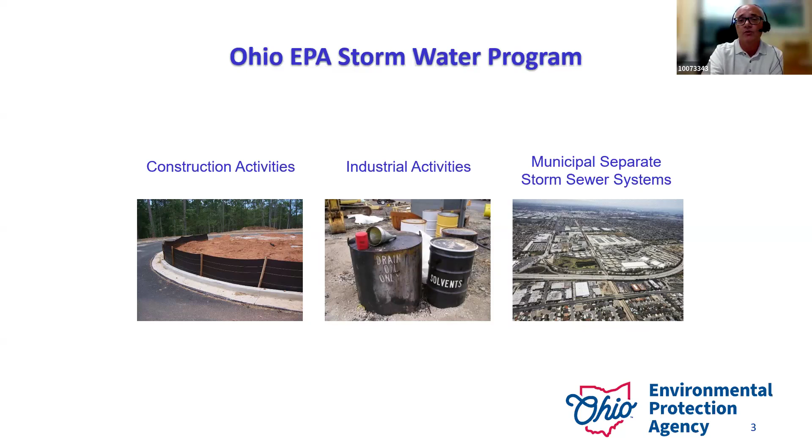The stormwater permit program is really a part of the NPDES permit program, or National Pollutant Discharge Elimination System permit program, that was established under the Federal Clean Water Act back in 1972. Originally, those permits were really just issued to wastewater discharges, and it really wasn't until 1992 that they were applied to stormwater runoff. Within Ohio, it's codified within Ohio Revised Code 6111 that in order to discharge pollutants in runoff from your site, if you're one of those regulated activities, you have to have an NPDES permit and comply with it.

So you will need a permit if you discharge your runoff to waters of the state or to a municipal separate storm sewer system, or MS4, which is basically a publicly owned conveyance system for stormwater. But if you discharge your runoff to sanitary sewers or to a combined sewer system upstream of an overflow regulator, you really wouldn't be required to obtain an industrial stormwater permit.

And we have our first poll question. When did Ohio EPA first begin issuing stormwater general permits?

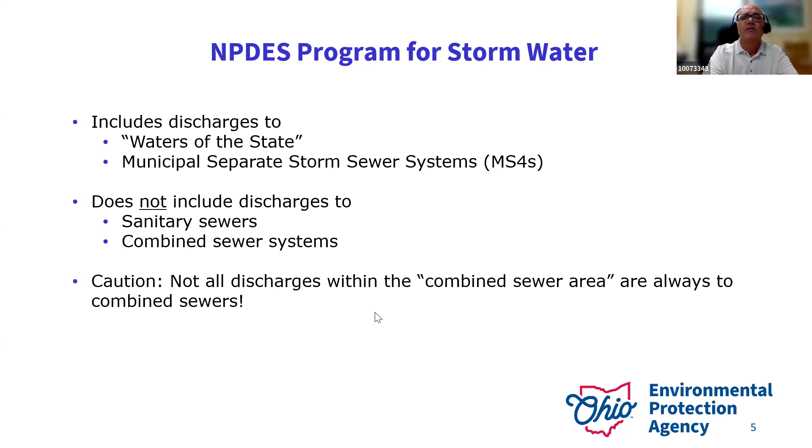All right, so who needs an industrial stormwater permit? What types of permits are out there for you to obtain the coverage that you might need? That's what we'll cover over the next section. So the definition of stormwater associated with industrial activity can be found within Ohio Administrative Code 3745-39-04(B)(13). That's where it lays out the types of facilities that would be potentially subject to needing a permit. There's 11 different categories. They're pretty broad, but if you really want to break it down in the easiest way to understand, basically, if you manufacture anything, you are likely to be pulled into the program.

We also do include some other categories that don't necessarily manufacture stuff, like maybe a recycling facility or a municipal solid waste landfill, but those are also included within that definition. So if you fall within the definition of stormwater associated with industrial activity, this program may affect you or does affect you.

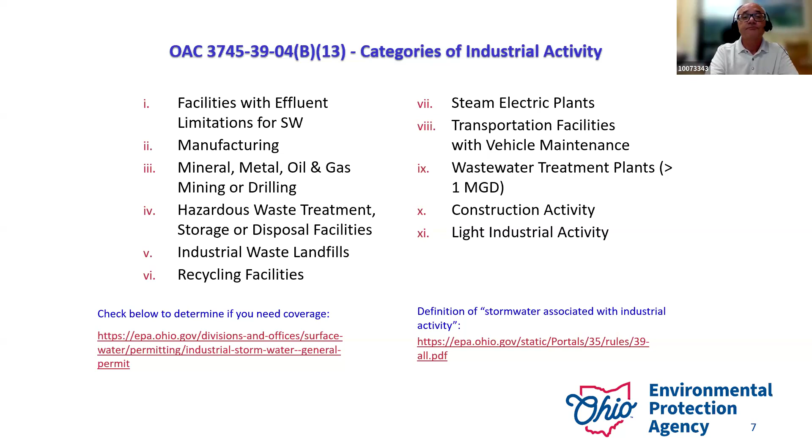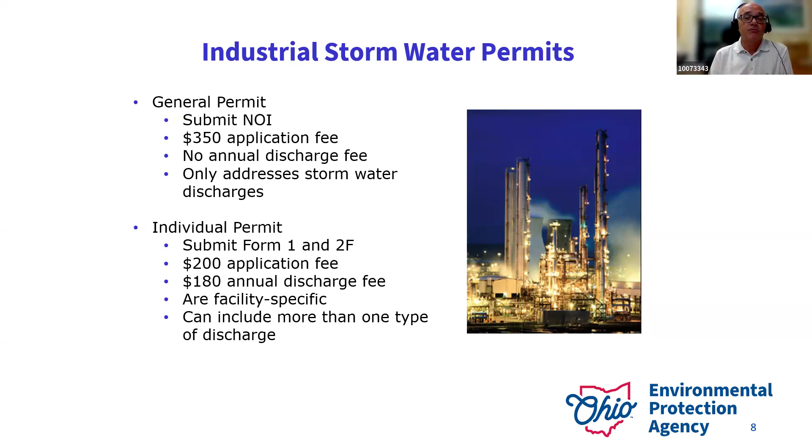All right, so in terms of getting a permit, you can get coverage under our general permit for industrial stormwater that Ohio EPA issues, or there's also some facilities that get their coverage under an individual permit. Those are typically facilities that may have more than one type of discharge that requires an NPDES permit from their site. For example, they may also discharge process wastewater in addition to the stormwater from their site, and therefore, if they've got multiple types of discharges, it might just be easier to have one permit that covers all the discharges rather than having a separate permit just for the stormwater runoff.

Ohio EPA issues that general permit once every 5 years, just like any other NPDES permit. It'll be issued in effect for 5 years and then get renewed. And terms and conditions within those permits can change from permit term to permit term.

We are currently in the 7th generation of our industrial stormwater general permit, which is also known as the multi-sector general permit, or MSGP. If you hear me use that acronym throughout this presentation, I'm just referring to our general permit. The majority of our facilities are permitted under this general permit. And on the slide, you can see some changes that have occurred to that permit over the last couple of permit terms. We'll talk about some of the significant ones that are currently in place later in the presentation.

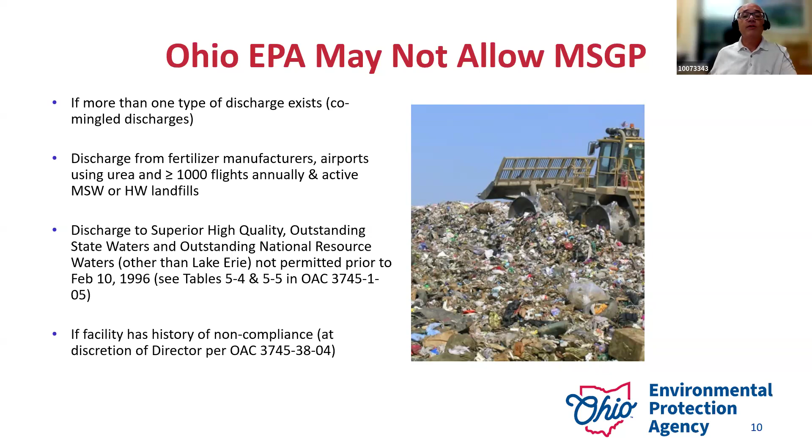Like any other general permit that Ohio EPA issues, there are eligibility requirements. So it's possible that your facility is not eligible for coverage under the general permit. If that is the case, then your option would be to obtain your coverage through an individual NPDES permit. So on the screen here, you see some of the situations that make you ineligible for coverage under the general permit that would require you to get an individual permit instead.

There's also a general permit that covers the stormwater runoff from bulk petroleum stations and terminals. It has its own separate general permit for those types of facilities, and stormwater is included within there. If you have an individual permit, look to see if your permit has parts 4, 5, and 6. If it has parts 4, 5, and 6, that means your individual permit covers your stormwater discharge.

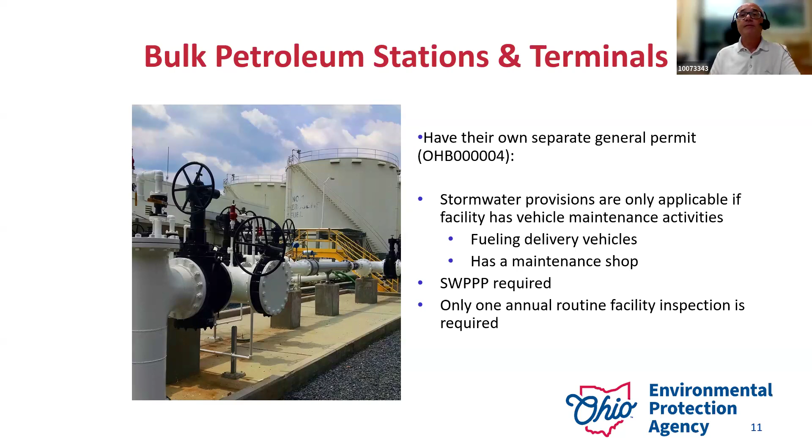Now, within the MSGP, we translate those SIC codes into what we call sector and subsector codes. And we do that using a table that you can find in Appendix D of the MSGP. And that's important to know what special conditions apply to your specific facility because of that specific activity that you do. And we'll talk more about that in a bit.

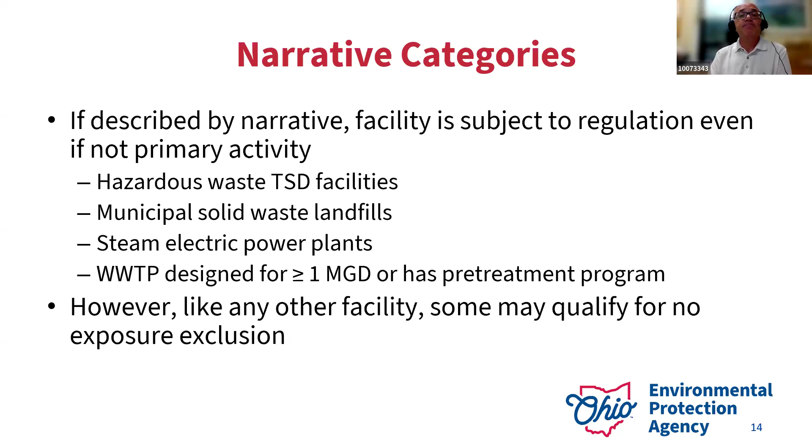All right, so if you need coverage under the general permit, if you're a brand new facility, you're supposed to develop a stormwater pollution prevention plan or a SWPPP, and then submit what's called a notice of intent or NOI for coverage under our multi-sector general permit. It's supposed to occur at least 180 days prior to when you intend to initiate your operations at the

facility. For those of you who are existing facilities and have permit coverage, every 5 years you'll get a notice to renew, and that renewal typically requires you to submit a new notice of intent and then revise your plan within a certain amount of time. So a renewal notice of intent is typically due within 90 days of the date that you're notified. And then the stormwater plan has to be amended within 180 days of your effective date of permit coverage.

Like any other NPDES permit application these days, it's all done electronically through Ohio EPA's eBusiness Center. So we have lots of guidance materials that are available to you on our website for how to complete a notice of intent, step-by-step guides with screenshots, how to set up your account in eBusiness as well.

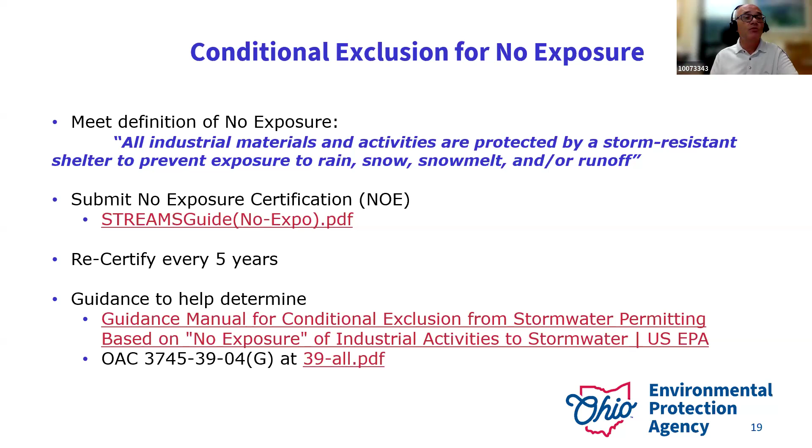There is a guidance manual available and some language in Ohio Administrative Code that you can review to determine whether or not your facility meets no exposure. But just quickly, I'll go through some examples. One common thing that might pull you into the program is having a waste dumpster exposed outside.

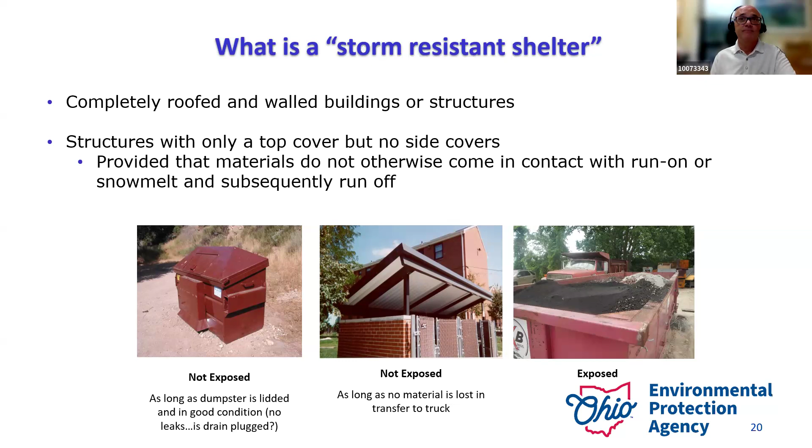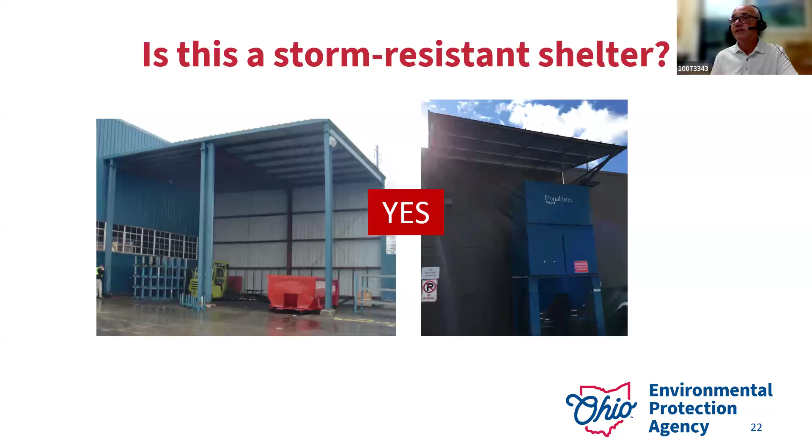Here's just some more examples of storm resistant shelters, but notice that they are structural attached roofs essentially, or awnings, metal awnings over the area where the industrial materials or activities are conducted.

In that no exposure guide, it goes into more detail about what can be exposed and not really disqualify you from the no exposure exclusion. For containers, tanks, drums, barrels, basically they have to be sealed. There can be no operational taps or valves. They have to be in good condition so nothing's leaking from them. And you cannot transfer material to or from the container while it is in an area that's exposed to stormwater.

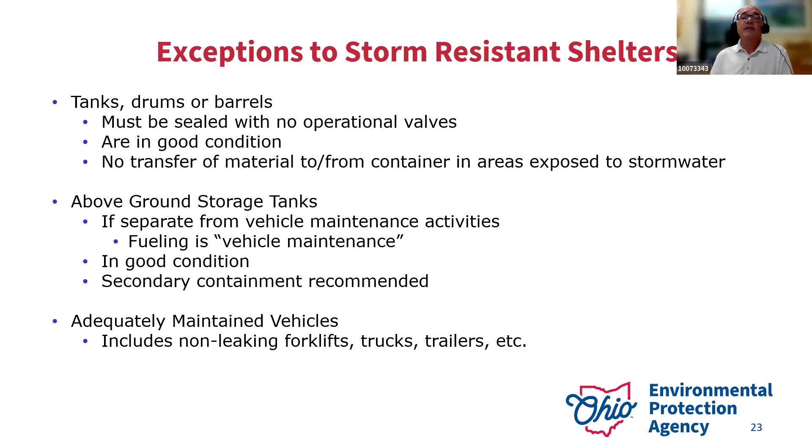So if you got a tote outside that's got a cap and it's sealed, you'd have to bring it inside the building to open the cap and add more material to it, and then you could take it back outside. So there's some conditions there, and you can see some of the other situations that also need to be thought about.

People ask us oftentimes about tarps. Well, I've got my waste dumpster and I put a tarp over it, why can't I qualify for no exposure? Ohio EPA's take on that is a tarp is a temporary type of cover. They're prone to needing more maintenance, they tear, wind can blow them, and it's very easy for people to forget to reattach them after each and every use. And so we don't accept that really as a practice for no exposure.

However, if you have a permit and you have a waste dumpster outside, tarping it is an excellent best management practice to minimize the exposure of those materials to the stormwater. So it's just all in how we look at that.

There's an exception if you're doing remodeling inside your facility and you need a construction and demolition debris temporary dumpster outside, for that temporary time period that you're doing the remodeling for that debris material. That can be at your facility outside, and it would not disqualify you from the no exposure exclusion because it's just a temporary thing that shouldn't be there for very long.

We also don't require - you also can store materials that are intended for outdoor use without just getting disqualified for the no exposure exclusion. However, there's a limit on that. It can't be things like salt or other materials that would be erodible or dissolvable.

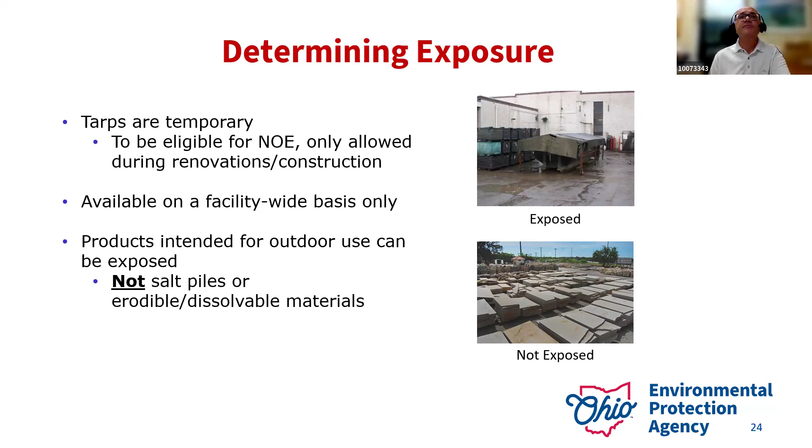Just some more examples to kind of show you here of what might be exposed and what might not be exposed, or what you might have to think about a little bit closer.

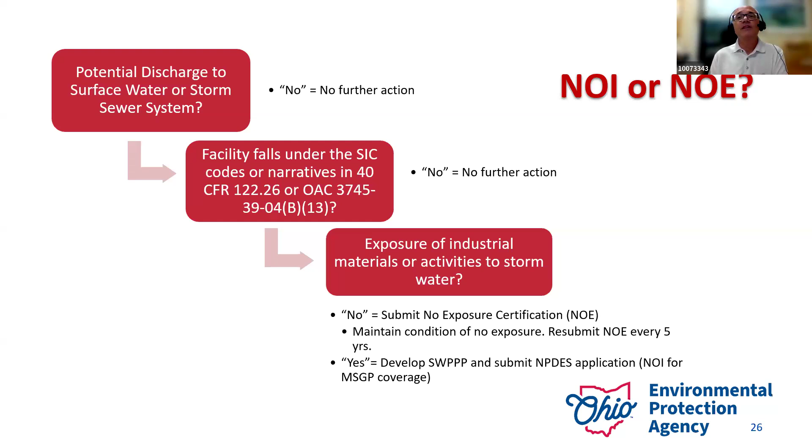So do I need to submit a notice of intent, or NOI, or a no exposure certification, NOE? Well, just follow the friendly little flow chart here and hopefully that will give you your answer. Just to give you an idea, of the roughly 4,000 plus facilities that Ohio has under our general permit program for industrial stormwater, about 2/3 of them have permits and about 1/3 of them have no exposure certifications.

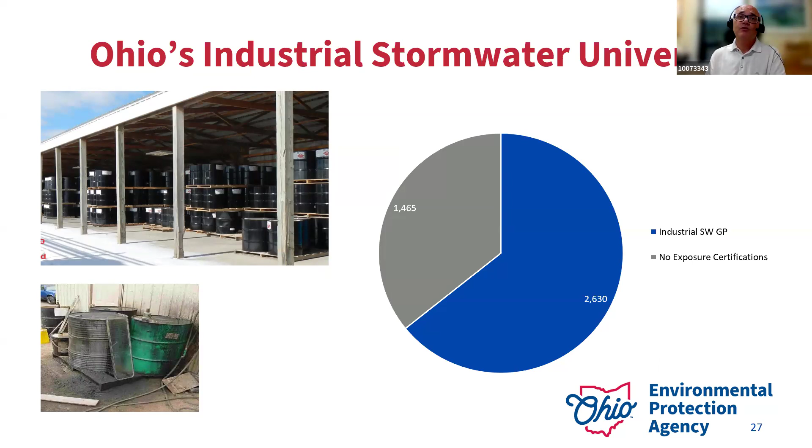All right, it's time for our second poll question. Which of these are not considered to be a storm-resistant shelter?

Sarah, you let me know when in the poll. Or did I do all that? Yep. All right, so the poll has been shared.

So the winning answer was the correct answer, a tarped waste dumpster. Remember, that's a great BMP, but it won't get you out of needing a permit. All right, very good. Let's move on. So if you need a permit, what does the permit require of you? That'll be the rest of the presentation today.

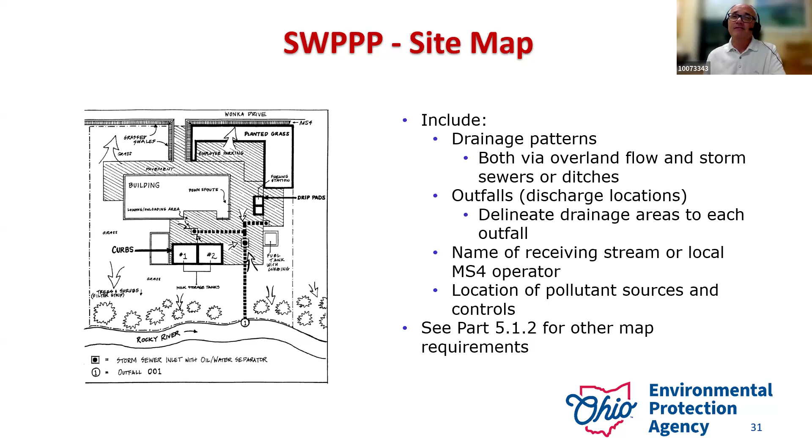It's also supposed to identify the acreage of your site. If you've got several outfalls which are substantially identical, which we'll talk about a little bit later in the presentation, it's supposed to identify which of the outfalls are substantially identical. So there's a number of requirements, and oftentimes when we do an inspection, we might find that the map isn't really as complete as it needs to be.

All right, so in terms of potential pollutant sources, you're going to basically just have a list of the materials that you handle or use at your facility. Those can be raw materials, intermediate products, byproducts, waste materials, anything that might at some point in its life at your facility become exposed to stormwater.

Think about where you load or unload those materials. Think about how you convey and transport those materials across your site. What industrial machinery do you have outside and exposed to stormwater? Where do you have storage areas, the boneyard, or your final product store, or raw material storage area on your site? Those are all areas of industrial activity, and we would need control measures for those areas.

Think about where leaks or spills are most likely to occur. Maybe you have a fuel station at your site, or maybe you've got a chemical silo outside, materials coming in and out of those containers. That's where a spill might occur. So that's also another area where you'd want to focus.

Maybe you store salt to make sure that sidewalks and parking lots are clean and safe to walk on in the winter. Where do you store that salt?

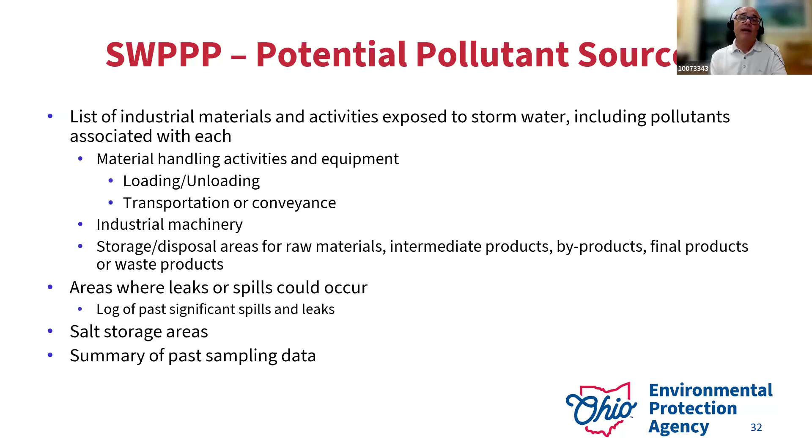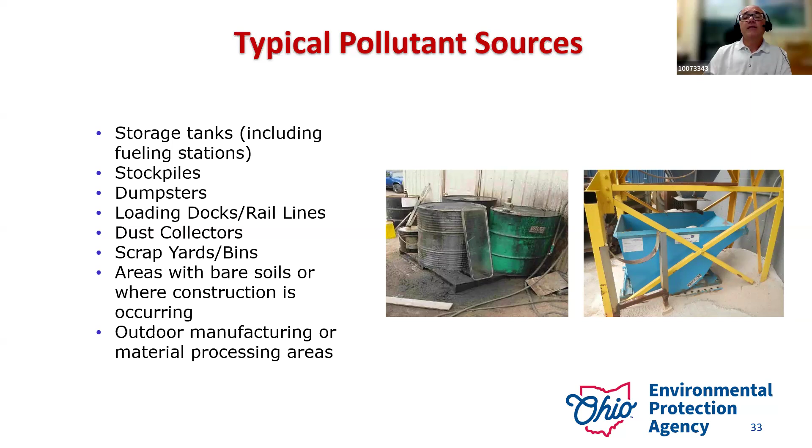So some potential typical sources that we see: storage tanks, stockpiles, dumpsters, loading docks or rail lines, dust collectors (your air pollution control equipment essentially), scrap yards or bins, areas where you have bare soils typically. Maybe it's an area that's just not paved, or maybe it's where you're doing some construction work of sorts. So that could be part of it. Or some sites, like a landfill, are always going to have an area of disturbance where there's bare soils. And then any outdoor areas where you might manufacture or process materials.

All right. One of the things that you're required to also do in development of your stormwater pollution prevention plan is to look for any non-stormwater discharges and make sure that your facility has the appropriate authorization for those non-stormwater discharges. So this is somewhat akin to doing dry weather screening in the municipal stormwater program.

But essentially, an industrial facility should be looking at their outfalls during a period of dry weather. And if they see flow, then they need to figure out why.

The permit includes a list of things that are allowed to discharge to the storm sewers that are not stormwater, but those are typically clean water sources, like maybe uncontaminated groundwater, or maybe you have a sprinkler system and that water is going beyond the grass and into the storm drain. So that kind of stuff, potable water sources, that kind of stuff is all okay.

But if it's not that, and you do see flow, you need to figure out: is it that, or is it something else? And if it's not on that list, basically it's something that you have to either appropriately permit or cease discharging from your site. That's called the non-stormwater discharge evaluation.

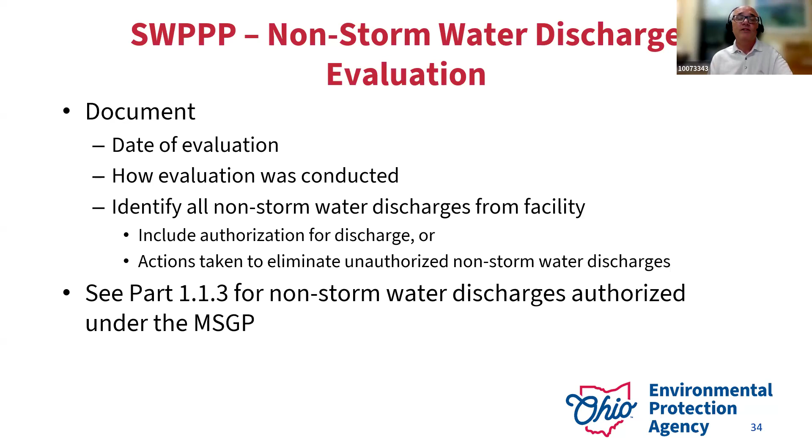So when we say cease discharge, people always assume that means stop. But then facilities think, I can never have that discharge. Well, not discharge, but there's probably a different way to handle it. So think about what typically we run into.

Maybe we run into a floor drain inside a building that is actually connected to storm rather than sanitary. So you could reroute that line to the sanitary, because all interior drains should go to the sanitary if they're allowed to discharge at all. Or you can cap that floor drain off so that nothing gets in it. So there's different ways to handle that scenario.

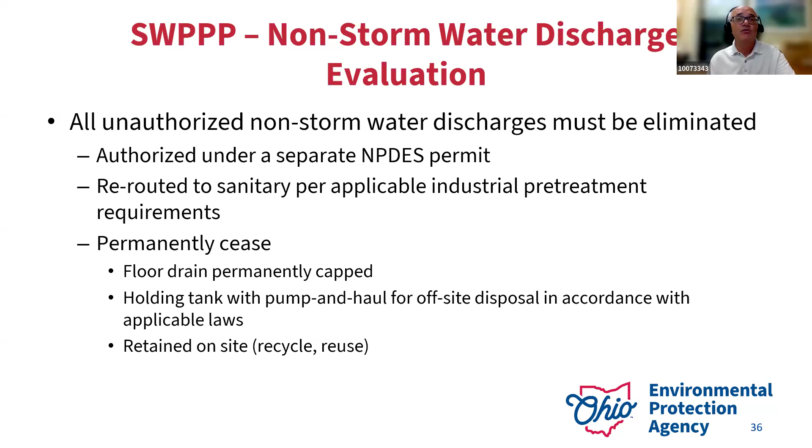Or maybe you can install a holding tank and then have an arrangement with a wastewater treatment plant locally to take that water and dispose of it there. Or you may have authorization through the wastewater treatment plant's pre-treatment program to discharge things directly to the sanitary sewer system. So those are all different ways that you can handle these non-stormwater discharges, but it is your duty when you're developing your SWPPP to evaluate your facility for these possible non-stormwater discharges and ensure that they're appropriately authorized or ceased. So learn to be a non-stormwater discharge detective.

So you might have to pour some dye down a drain to see where a floor drain goes for sure. Or you may have to climb up on your roof and see how well your air pollution control equipment is really working.

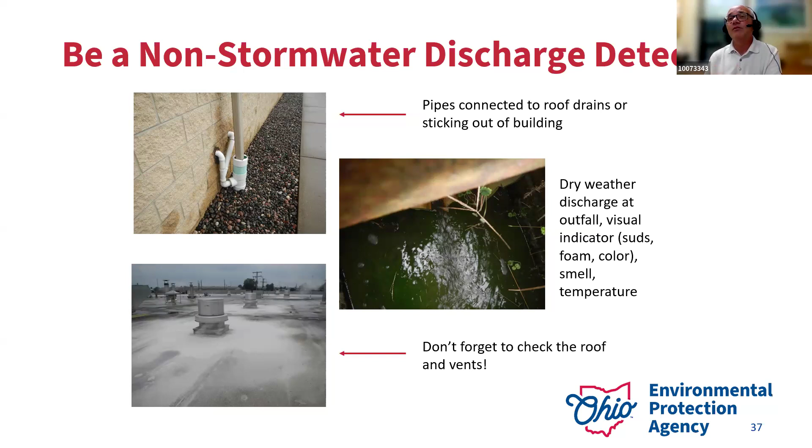As you can see in the lower left-hand corner, probably not that well. Do you have pipes sticking out of the building that are connected to the roof drains or to the storm sewer? What are those pipes? What's discharging from there? Oftentimes we find non-contact cooling water discharge that's not authorized going to our stormwater system, and that needs a separate NPDES permit to authorize. So be a stormwater detective.

In terms of control measures, there are certain control measures that are required for all. If you look at the permit, there's about 10 or 11 different sections, but they kind of boil down to the bullet points you see on the slide. So where you can...

Minimize the exposure of pollutants. Put a tarp on it, move it indoors, get a storage container of some sort, like a storage shed, stick it in there. Good housekeeping - keep things swept, clean, orderly, neat.

Preventative maintenance - you've got equipment out there. Is it on a maintenance schedule? To make sure that you don't have unintended leaks or pipe bursts that might cause oil spills and whatnot to get into storm sewers. Spill prevention and response.

If a spill occurs, do you clean it up right away? Do you have the equipment that you need to clean it up right away? Are people trained on what needs to be done when a spill occurs? That's all part of spill prevention and response.

Erosion and sediment control and runoff management is basically as it would sound. If you have unpaved areas of your facility, bare areas that don't have vegetation, do you have control measures in place to prevent sediment from getting into the storm sewer system? Or do you have maybe a stormwater management pond designed to remove pollutants from the site? If you're a newer build facility, you should have what we call a post-construction best management practice, but older facilities may or may not have something like that.

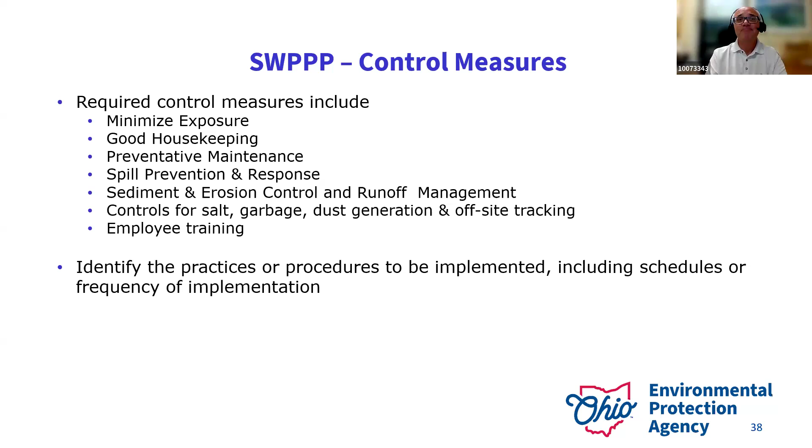Just to kind of speed up our presentation here, because I know we're starting to run a little shorter on time. In terms of how do I select my best management practices, the good news is there's lots of guidance out there. US EPA has a series of fact sheets broken down by the type of industry you are, essentially by your sector code.

That goes into, at this type of facility, these are the typical sources of stormwater pollution, and here are some suggested best management practices and control measures you can implement to address those sources. So it's kind of already laid out for you. It's not an end-all-be-all list. There was an effort a few years ago to update those lists that I don't think resulted in an updated list yet, but that might be forthcoming still.

So in addition to those fact sheets, US EPA has a guidance manual on how to develop your SWPPP and things to think about. There's also a separate manual for monitoring if that applies to your facility. So there's lots of available help.

However, I always tell people, use common sense. Is it outside? Can it get rained on? Can the runoff flow off your site, either directly into a catch basin, a drainage channel, and enter either a municipal storm sewer system or a water of the state? If the answer is yes, put something to prevent that - curbing, diking, tarping, relocating things inside, implementing good housekeeping practices and being vigilant about spill response, employing sediment and erosion controls like inlet protection on your catch basins. That goes a long way and will address a majority of the issues at your site.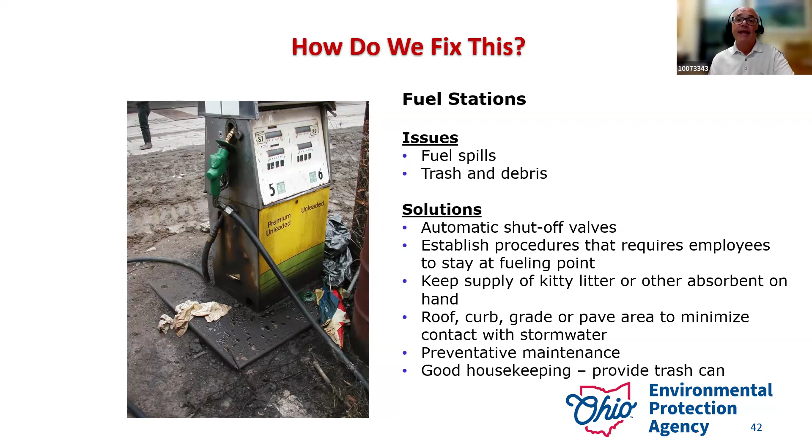You could go the extra mile and put roofs or curb or grade or pave that area in a manner such that any stormwater that might fall in that area would not get into your storm drainage system. You could make sure that you do the preventative maintenance on the pump to make sure that those mechanisms don't fail. And for the trash and debris, good housekeeping, provide a trash can, something as simple as that. So those are all possible solutions to this particular stormwater pollution source. So that's what you kind of need to do as you walk around your facility in identifying your sources and what control measures you'll be implementing.

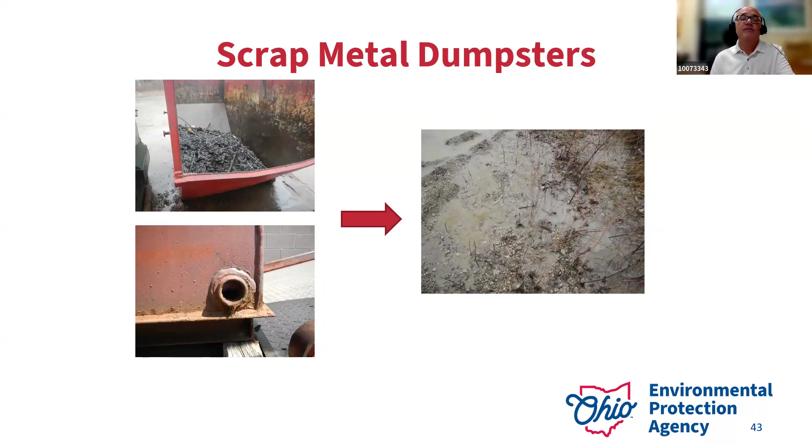One area that we get pushback on a lot is scrap metal dumpsters. Okay, so we understand, you have a contract, somebody brings you the dumpster and they don't necessarily bring you one with a lid or cover, but just be aware, here's an example of one where it's open topped and it has a drain plug and the drain plug is open. And then, during the inspection, we're observing sheen in the runoff from the site. So clearly, there's an issue there. The drain should be plugged and the bin should be tarped or lidded, like you see here in this photo.

And here's just an example with metal. So this is from an actual inspection with an actual facility. They used to store their metal on racks outdoors, but didn't take any precautions to cover that area because they also then cut the metal outdoors. So there was some processing as well that occurred. Well, they were subject to doing some monitoring under the permit that we'll talk about in a bit, called benchmark monitoring. They did it, and as you can see, the benchmark value for aluminum in this case is 750 micrograms per liter, but they were getting values that were between 3,600 and 6,600. So, well above that benchmark.

Then they said, okay, well, we're going to cover that. We're going to relocate our metals. We're going to cover those metals with a tarp. It's still outside, we still don't have room inside, so we're keeping it outside, but covering it with a tarp. And then they redid the benchmark monitoring to see if that was effective or not. And as you can see, you had a 10-fold decrease in the aluminum concentration after they implemented that simple control measure of putting a tarp over the stored metal outside. And now they're below benchmark. So again, don't discount the simplicity of these controls. Think logically, use common sense. That'll take you a long way.

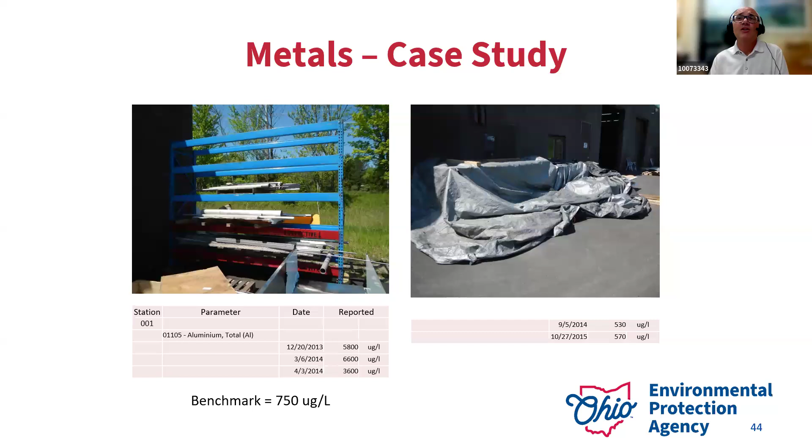All right, so when you look at the multi-sector general permit, parts 1 through 7 apply to all facilities regardless, but there's a part, Part 8, that makes up the majority of the 160 pages or whatever it is, that really is broken down into a number of different sectors. And you only need to comply with those sections of Part 8 that apply to your facility. So again, you'd use your SIC code and Appendix D to translate that code into a sector and subsector code.

And then you would only need to really make sure that your SWPPP addresses what's applicable to all, plus what's just applicable to your specific sector. And when you look at those, they're usually no more than a couple of pages within Section 8. So it's not really a lot of extensive extras, but there's going to be some extras specific to your particular situation. But those sector-specific requirements in general can maybe limit the coverage or specify prohibited discharges from your facility.

Like, for example, maybe if you're a mulch maker, you dye the mulch, it's going to prohibit the discharge of dyes from your facility. It might include more specific control measures, like, for example, if you're an auto junkyard, you're supposed to drain the fluids from the vehicles when they arrive. That kind of stuff is within the sector specific requirements. It may also have some additional requirements for your SWPPP plan, or may increase inspection requirements too. And it will also identify if you have any monitoring required.

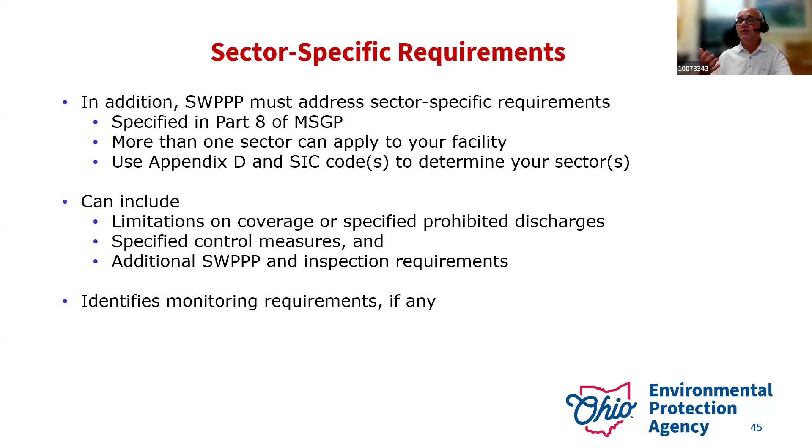So not all facilities, but about 60% of the facilities with a permit are required to do some form of stormwater monitoring under this permit. And if you are subject to that, that will show up under Part 8 of the permit, under your particular sector, and then you will look for your specific subsector to determine whether or not you have those requirements.

So let's talk about the inspection and monitoring requirements of the MSGP. There's two types of inspections. Those are applicable to all facilities. The two types of inspections are routine facility inspections and quarterly visual assessments. I'll describe what they mean in a minute. Then there's three types of potential monitoring, meaning collect your stormwater sample, send it off to the lab, and report your results to Ohio EPA.

Those three types of analytical monitoring that might apply to your facility, like I said, about 60% of the facilities, are benchmark monitoring, effluent limitation monitoring, or as requested by Ohio EPA. So I'll talk about those in a little bit more detail in the slides to come as well. But by and large, for most facilities, it would be the benchmark monitoring. All right, let's go back to the inspections.

The routine facility inspection is applicable to all permittees. You are required to do basically a walkthrough of your facility once a quarter and check out your control measures. Make sure that they're in place, that they're effective. If they need maintenance, that you do the maintenance then. Or if they're ineffective, you select something else, amend your SWPPP and move on. So those are required every single quarter.

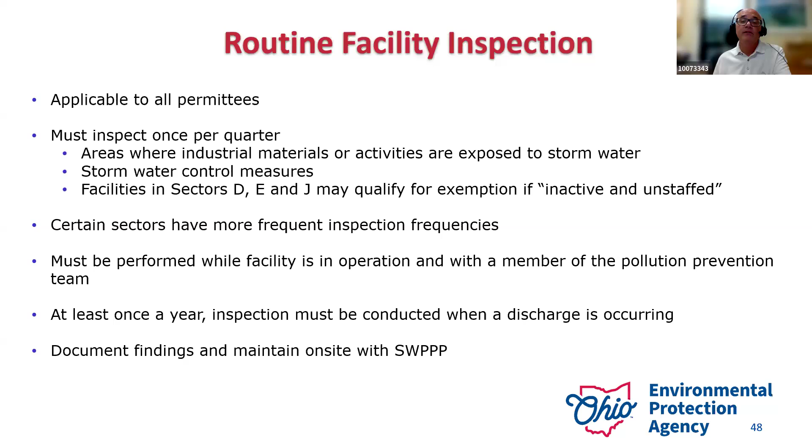So typically when it's raining or shortly after it stopped raining, right? All right, and then you are required to document your findings and maintain your inspection results on site with your stormwater pollution prevention plan. They have to be made available to Ohio EPA or the operator of the municipal separate storm sewer system upon request.

The second kind of inspection is the quarterly visual assessment. Some people think of this as monitoring, but it's really not monitoring. They think of it as monitoring primarily because you are actually going out and collecting a sample of your runoff. You're actually required to go out and grab a sample of the runoff from each point of discharge within the first 30 minutes of discharge from the first storm after a dry period of at least 72 hours prior, and observe what's in your collection jar.

So you're looking for the physical things or the olfactory things that you can sense that might indicate pollutants are in your runoff. So it's things like color, odor, clarity. Is anything floating? Anything settling? Anything suspended within the water in the container? If I close the lid and I shake it up, am I getting foaming? You're looking for those obvious indicators of pollution.

If you see that, then you're supposed to go back through your facility to figure out what the source might be, make sure your BMPs are in good stead, and if not, fix them, maintain them, replace them, repair them, etc., and then see how you do the next quarter, right? So again, you'd have to document those findings in a report that stays on site with your stormwater pollution prevention plan, and make that available to Ohio EPA or the operator of the municipal separate storm sewer system upon request.

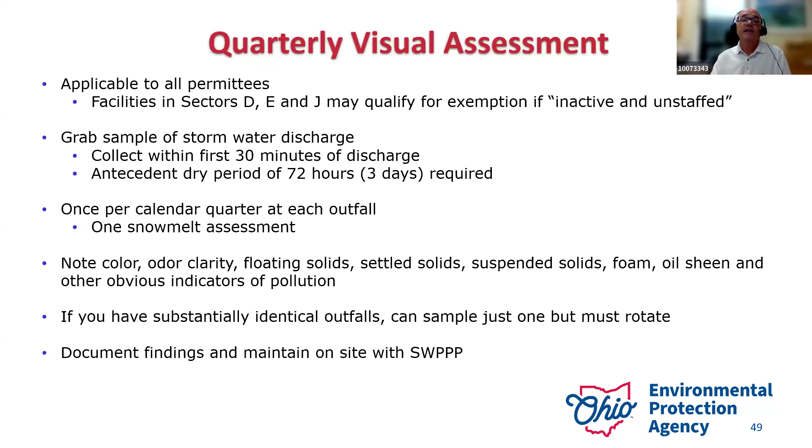Analytical monitoring, if you are subject to it, regardless of the type of analytical monitoring, the same sampling requirements apply as what applies to the visual assessment. You have to collect that sample, it's a grab sample, within the first 30 minutes of discharge, and from a storm event that produces runoff from your site. That's the first rain that's occurred in the last 72 hours. So you have to have the antecedent dry period of 72 hours or more. That's the storm you want to sample.

If you are subject to analytical monitoring, the results have to be reported to Ohio EPA. So you use what we call our eDMR system, or electronic discharge monitoring report system, through our eBusiness Center to report those results. You are required to report those results within 30 days of receiving the results from the lab.

Now, for the current permit term that we're in, it started back in 2022, right? So June 1st, 2022. So I'm going to talk about the schedule for benchmark monitoring here shortly, but for the facilities that are currently under permit, if you were subject to benchmark monitoring requirements, your deadline to complete that monitoring for this permit term is over. So have you recently received a notice of violation for not submitting your data? Here's a link to some instructions for how to submit your data. All right.

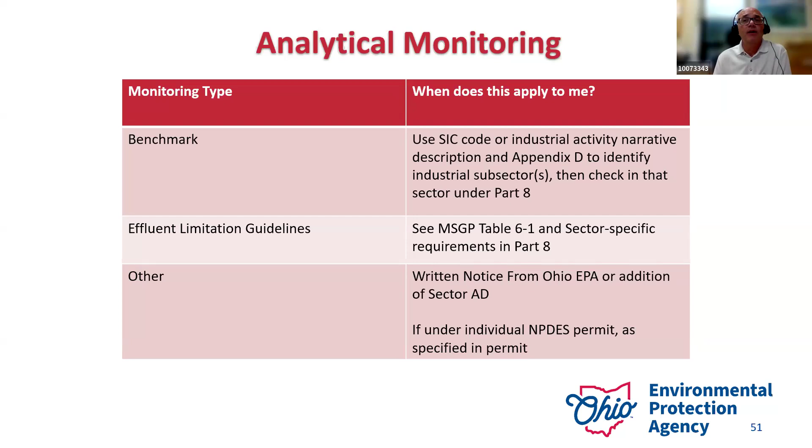And then the other type of monitoring that we'll spend very little time on is you may get a written notice from Ohio EPA, or we may issue you coverage under Sector AD, which is a catch-all sector, to catch things that aren't in the other sectors, that we might want to assign monitoring to you for, because we've had some past history with you, or there's been an incident, and we need to keep our eyes on the runoff from your site.

All right, in terms of benchmark monitoring, since it is what's most applicable to most facilities, you are required to do the monitoring for your primary industrial activity and any co-located activities. So that means your primary SIC code and any secondary or tertiary SIC codes that apply to your facility. A lot of times those secondary codes keep you within the same sector, but might put you in a different subsector, so there might be a little bit different monitoring that applies.

But other times it may put you in a completely different sector, so you've got two completely different sets of parameters to monitor for. But the important thing to keep in mind is that if that sector is only going to that outfall, then that's the only outfall that you have to apply that other monitoring to. So it really is broken down by the drainage area going to that outfall.

So you are required to take at least 4 samples over the first 8 quarters of permit coverage. Each time that you renew your permit, this starts over again. Some facilities think that they did it once the first time it was in their permit and they don't have to do it again. That's not true. Every time that permit is renewed, this is your schedule. So you have to redo it.

In this current permit, we actually changed the schedule. It used to be that you had to do 4 samples in 12 quarters. We've reduced that down to 4 samples in 8 quarters, and it's the first 8 quarters of coverage. So 1 sample has to come from each quarter of the calendar year. That means you have 2 chances to grab a winter quarter sample, 2 chances to grab a summer quarter sample, and so on. But you've got to do at least one of those 2 and report that data to us over that first 2-year time period.

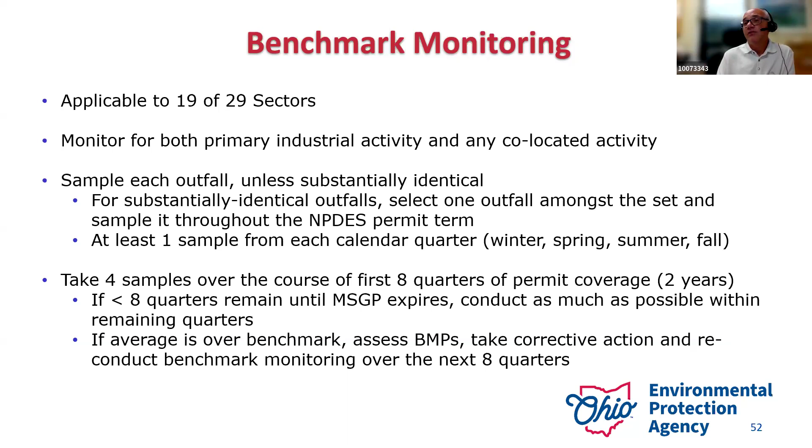All right, okay, we're ready for our next poll question. Very good. Actually, we're going to have a couple of poll questions. The first one: all facilities are required to conduct routine facility inspections, quarterly visual assessments, and benchmark monitoring every quarter. Is that true or false?

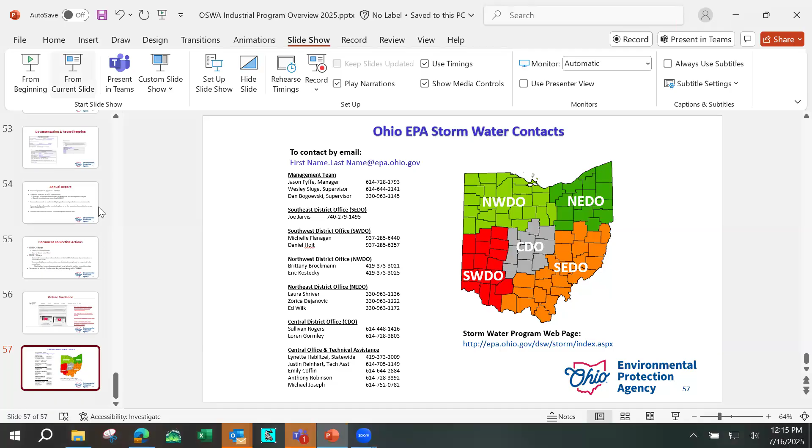Let's see here. Zoom. I don't... oh, here's the share button. Okay. Screen share. Yeah, and if I say concurrent. There, there we go. There, perfect. Yep, thank you.

Okay, and then the last question: if a TARP is considered temporary, as we discussed earlier in the presentation, but then later there were some slides that had a TARP, how long does the agency consider it too long to manage exposure with a TARP?

The point of the TARP was if you have a waste dumpster and it's just tarped, your facility is not going to qualify for the no exposure exclusion. But if you have a waste dumpster with a tarp on it and you have a permit, that's good because it's a BMP. As long as the tarp is in good condition and you remember to put it back in place, it's a BMP. We'll be happy with that tarp if you have a permit, but it's not going to get you out of having a permit. That's the key lesson.